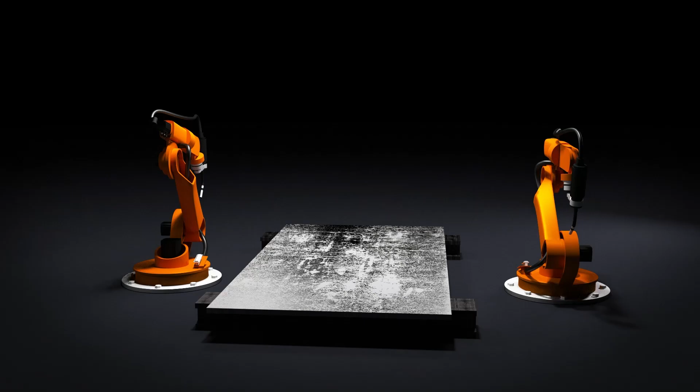It's been a minute, but I've been working hard getting all this taken care of. This will pretty much wrap up this job. Got everything built virtually. Now all that's left is for the cold-blooded killers in the shop to take care of business and build it in real life, bring it all to reality.

So this wraps up. I left the sort of not really simple, but more straightforward stuff to the end. So even though logistically it's going to be big, we're going to have two big old boxes, and we're going to have two smaller boxes, but both of them are going to be very long.

So I broke the files up into working on the casino box, as I call it - these are the smaller ones. And then I call them the mains boxes, the big main boxes. I'm going to go over those in another video, but for right now I'm going to concentrate on just the small casino ones.

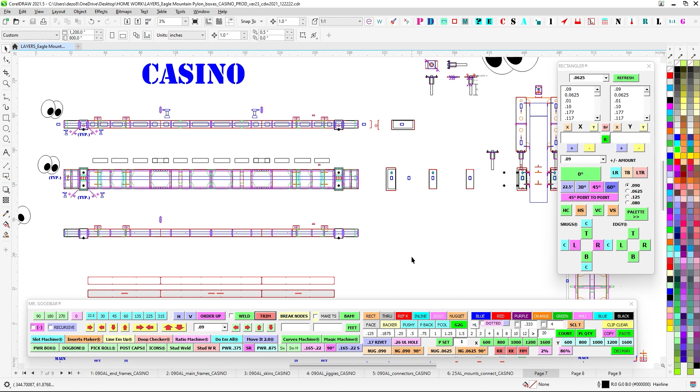These are going to essentially be the same, so one will let you get your eye in for the other one with just a few details. Like I said, these should not be too difficult for you guys. It's just a matter of making sure we do things in order so that you don't catch yourself out. So for the most part I'm just going to be going over what's weird, but otherwise just things to look for.

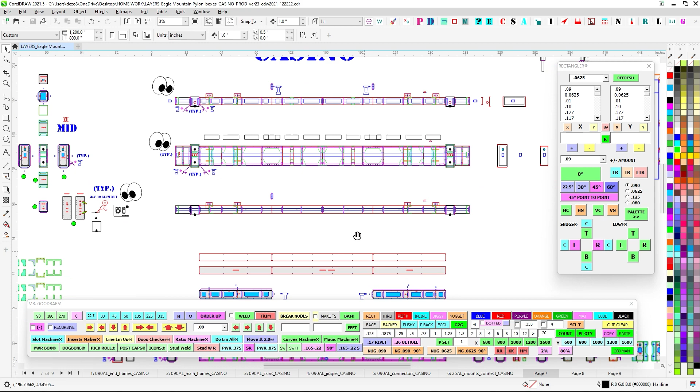But otherwise, you're making big old boxes, then you're going to skin them and that's it. So let's get after it. Let's go over the lay of the land here.

So we've got end pieces, I broke those up into their own file. Essentially you have an end piece here, and then you have sort of the strap piece, sort of the decorative bigger box. So you've got one for the top, and it just kind of mirrors.

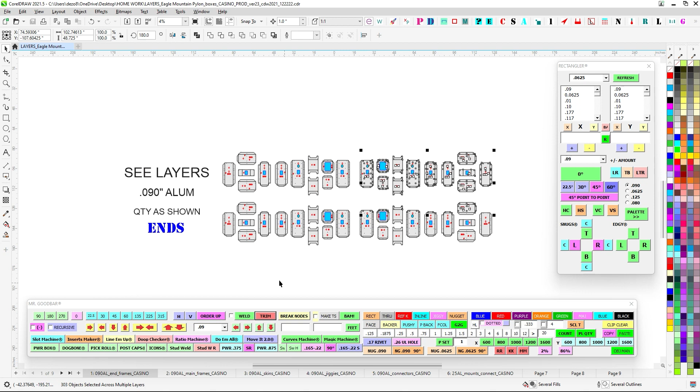So you'll have 4 ends here, and then you'll have your main frame boxes. These are here, and you've got 20 of these and 8 of these - make sure we got enough. That's for both sides.

I got all the skins - you got your end skins, you got your decorative box skins, and then the main kind of box there. Got all your jiggies on one page - so you got your ends here, ends, and then your main box jiggies.

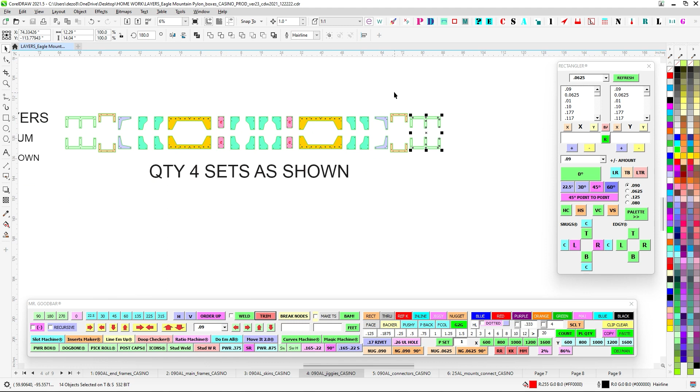So these are going to be for connectors, I'll go over that. These are that kind of decorative straps that sort of make it look like it's attached to the boxes each other. But these are also going to be how we snake secondary cable - we'll go over that.

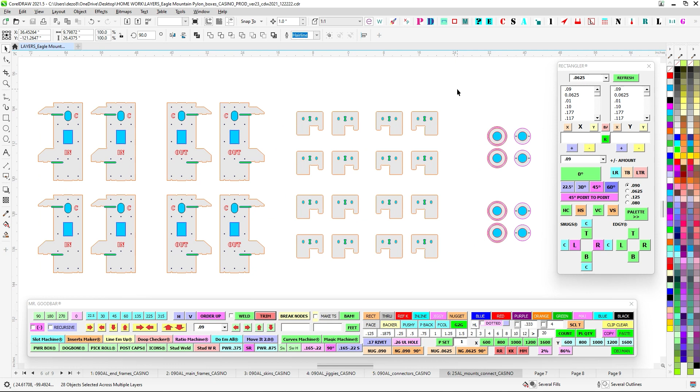And then for various things it's mixed up - these are going to be for those mounts that I just talked about, and then these are going to be for the main structural mounts, we'll go over that. So you can see there's not a lot, it's just there's a lot. But otherwise it should hopefully be straightforward for you guys.

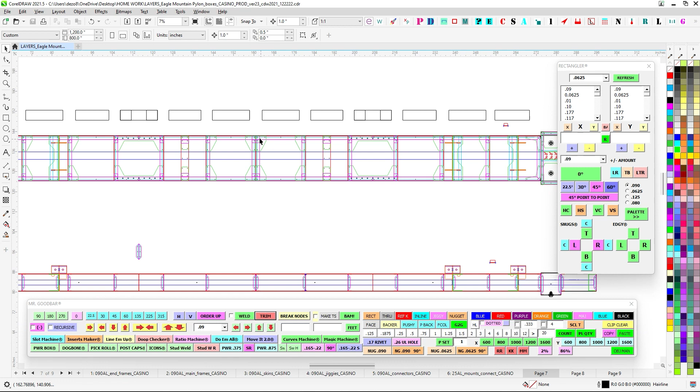So it's kind of broken up into - in order to stabilize the seams properly, I went ahead and broke these up into kind of 2 boxes put together here in the middle, and then another box this way, and then you've got the decorative kind of stacked boxes here. So what you're going to do is...

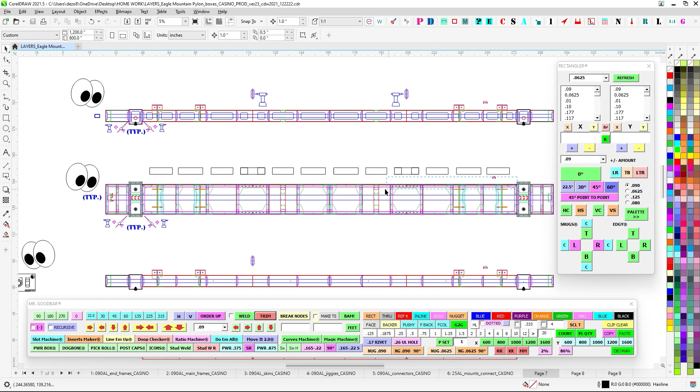Go ahead and get your long pieces going first. I'm doing the simple rivet method where you're going to rivet it together, and then your jigs here will be what holds it together. So you're going to create one long piece here that's going to take care of the main box, top and bottom, and then you're going to go ahead and put all your braces in. But the middle center ones here, you're going to go ahead and rivet those together so that way they match up and they're nice and solid.

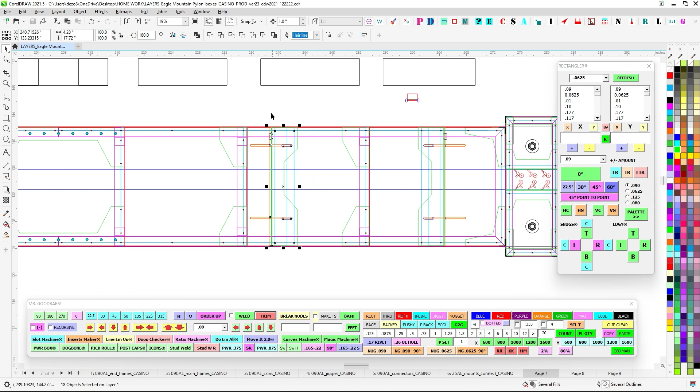And then once you get that box all ready to go, again, you're not skinning anything, you're not doing like that - you want to make sure that you get these guys in there. Probably, yeah, you're going to do that before you skin, obviously. So these are going to be your kind of mounts, so let's go over that.

So you're going to have like a top view here. What you see in orange right here is going to be how this thing basically attaches to the 3x2, and that's going to be your main burn area - you're going to burn that really well. And then that's going to poke out the back of the box.

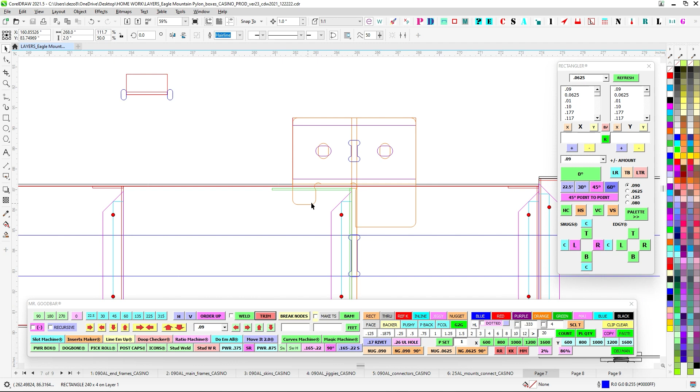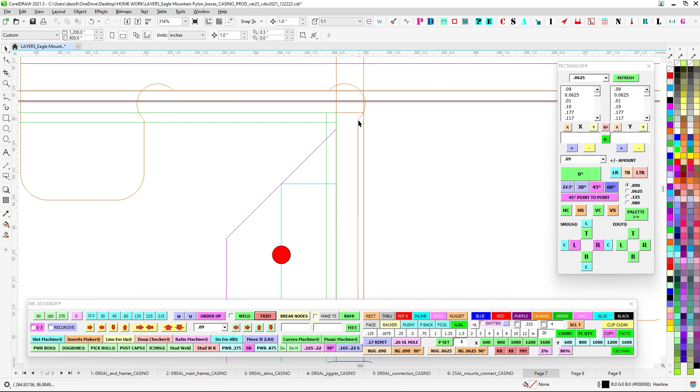And then that's where you're going to also attach your mount plate. Now the mount plate, in order to not just have a single rectangle of aluminum that can flap and be difficult to get lined up properly, I'm having it skewer into the box. You can see where I have a 16th overlay that's going to nestle into a groove in the mounting plate that will help you center it.

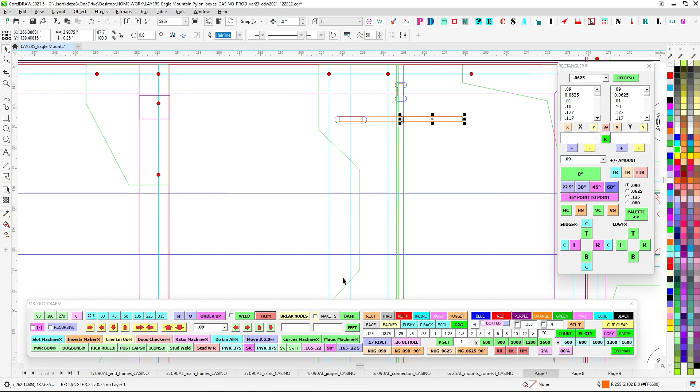You can see where the groove is actually longer on the bottom, so you're going to slide this piece in and it's going to groove to the top. And then in the main brace piece here, you're going to have a slot that this little nugget is going to slide into.

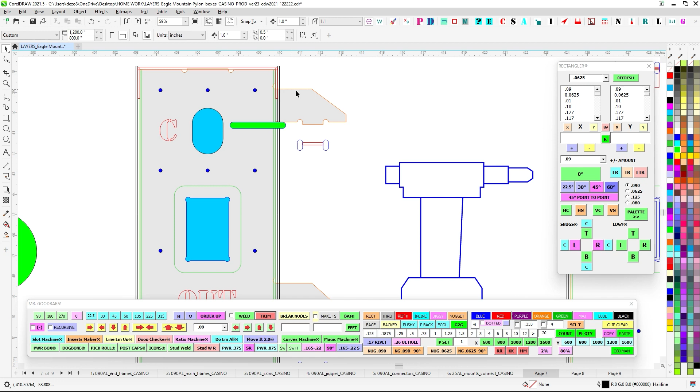So you can see where the green is here. The green, you're going to go ahead and rivet and attach that here, to your aluminum quarter piece that sticks out. So you can see where that's going to be your mounting tab top, and this is going to be your mounting tab bottom.

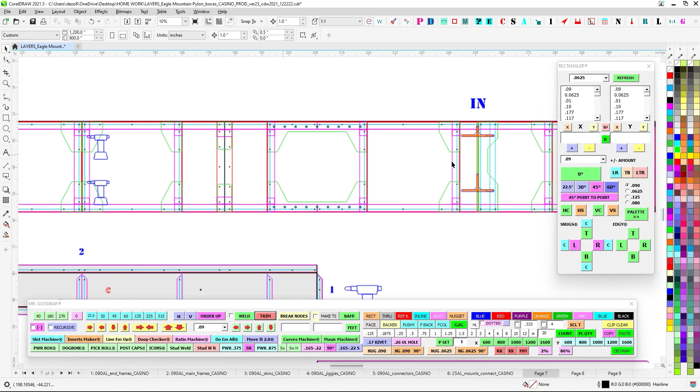It's going to rivet to that. Now you have an in and an out, and this is also going to be on the big box, but it just means that this one is on the inside of the center. So from the center over, you've got your in and your out, and then they mirror - this is your out and this is your in on this side. You can see where this one does this, and then this one's here, and vice versa. So you just want to make sure those get properly mirrored and taken care of.

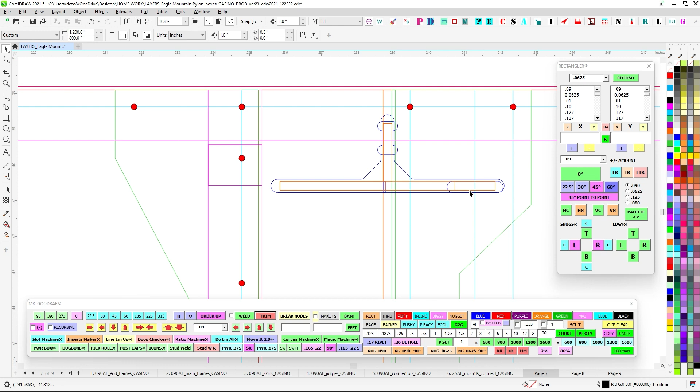And then once you slide those bricks, those little plates, they'll slide in. You'll be able to do a nice fillet weld on this side, and then you'll have a fillet weld on this side. And then you'll also be able to reach inside while the faces are off, and burn this tab to this 090 piece.

And the top view there - yeah, so you can burn right here, you can burn on the bottom, get that in there nice. This will help you get this registered, not only turning this way, but also up and down, left and right. It'll make sure this is level.

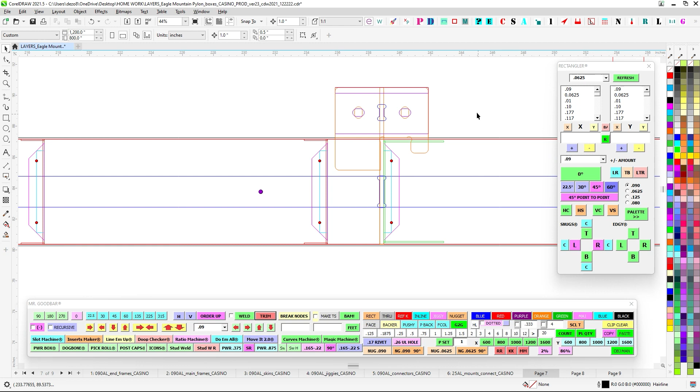So that way when they go to put that up. And then this also gives you a whole other dimension. So rather than just burning here and here, this burns here, but then this turns vertical, and it gives us all kinds of strength right here. And you can burn on the bottom too, so that way it's really tying into this plate.

And then obviously when you skewer the 2x3 through, you're going to make sure that gets burnt up really well. I went ahead and clearanced this as well, so you can burn on both sides - plenty of room here to burn. I would make sure this is rivet only. I wouldn't do Lord on this, because you're going to put heat into this and this plate's going to move around, so I don't think we need any Lord.

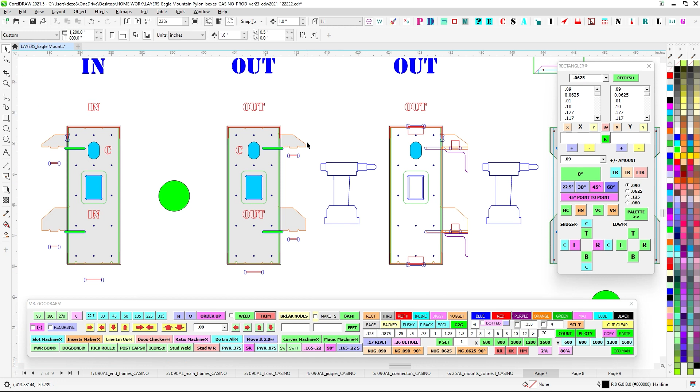Really, this 090 plate is just kind of to get you to register the quarter inch where it's supposed to be. That's really all it's doing, but it's also going to add plenty of strength. So we're good to go there. I think that's good, I think that kind of figures that out. And then the rest of it is just the normal sort of braces.

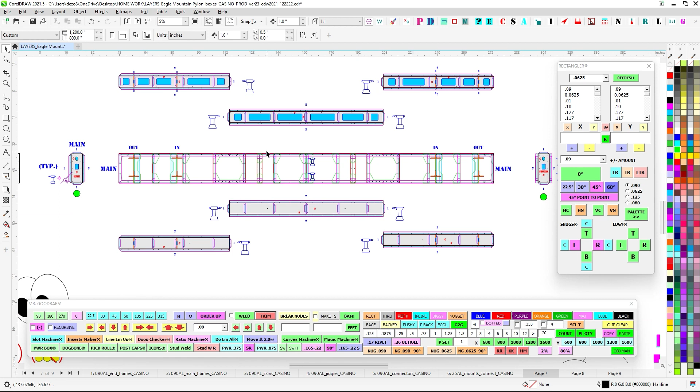Now, where we do the faces, I want to make sure these faces get on there really well, because we're used to having all of our signs on the ground, and it's basically a sign. When a sign goes up 40, 50, 60 feet in the air, it becomes a weapon. So we don't want anything falling off this thing ever. So I went ahead and made sure we have large face seams to make sure things are very stable.

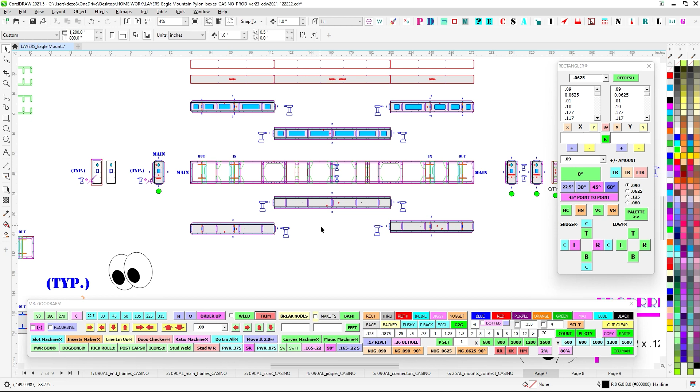So rather than just sticking them on one of these frames, they'll have their own C channels. So that's where you'll see here, you'll have your own C channels on both sides that plug in. And then that way the faces will have a very large area to Lord really well.

And then I'm also thinking that we'll want to do safety rivets here and there just to make sure. So go ahead and do your countersunk rivets on all the panels just to make sure we also have mechanical as well as chemical, all of that. Take care of it, make sure it's all good.

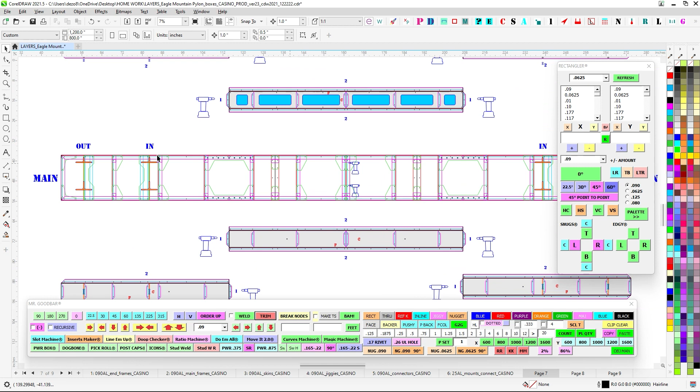So I think you guys got the idea here. It's just going to be one big box. But again, just make sure the 1/4 inch pieces go together properly. Hit me up if you have any questions or anything. And then make sure that your outside main is going to be ready to mate up to the next parts. So now we have our ends, and then we have our mid.

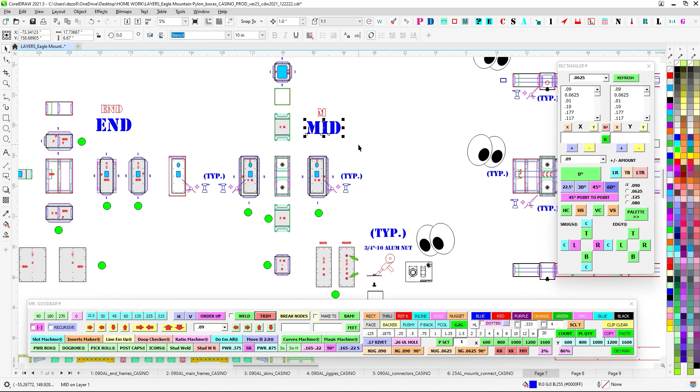So I'm calling it the mid, but technically it's all the ends here. You can see where it's this little structure here. Now this brings up the 3x2. Make sure you bring in the 24 inch, or the 24 foot, I should say. I went online, I made sure that they have this available.

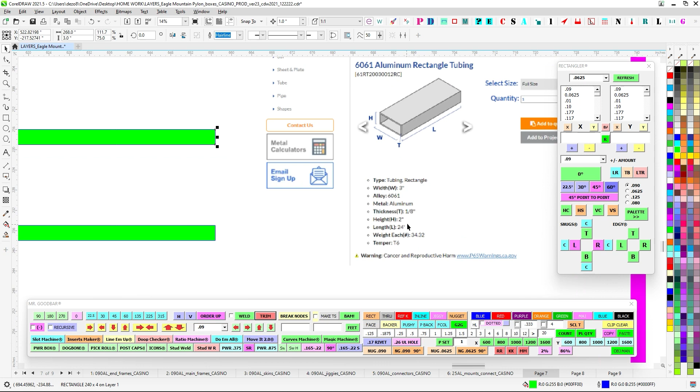You might have to call, it might have to be get it going now. It might be a lag, but I know everything we bring in is usually 20 foot, but we want to make sure we have the extra length on this, which is the reason why I went with the 2x3. You cannot get 2x4 in this length according to their website, but you can see where we need to make sure that it goes all the way out and extends into these decorative boxes.

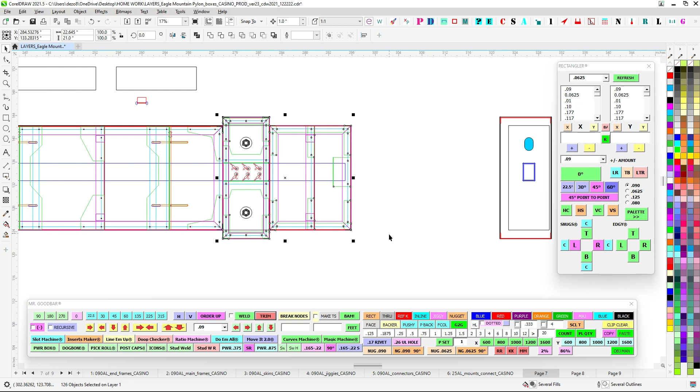Now, the problem is these technically are decorative, but the problem is around the shop, I guarantee you this is where they're going to get lift from, and also it'll probably get rested on here. The idea is that this is where the sign mounts to the actual post. So really this is non-supportive. But ironically, like I say, around transportation, the way we lift these things will actually be the Achilles heel.

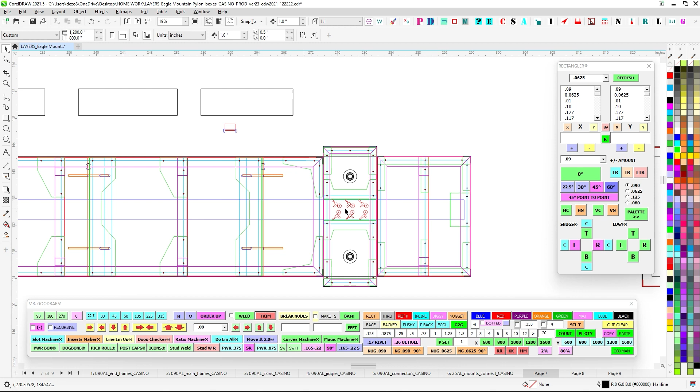So these need to be stronger around our shop. So that's why the 2x3, it's important that it skewers all the way. A normal 20 footer is not going to fit. It's going to stop right here. So we need that extra out, so that way it goes all the way out and extends into this box. Then we have the strength.

So what you're going to do is just build these guys. They are directional because you can see where, let's go take a look over here. You can see where they're offset and justified forward. So the backside's skinny, so these are asymmetrical. Make sure that they get assembled properly that way.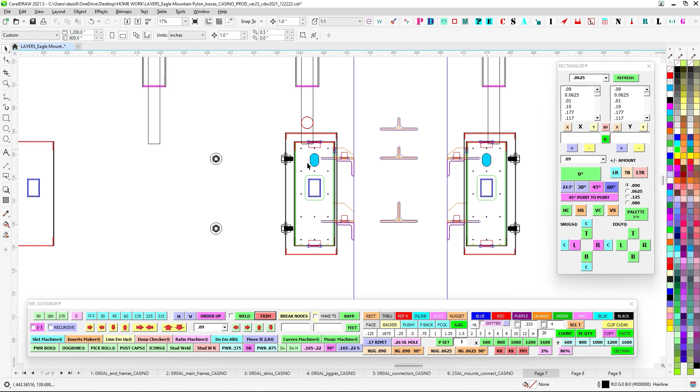So when you do the mid, you're just going to create this little box here, right? You have a little jig here, and then you have internal pieces here and here that essentially snug up against the tubing when it comes through. So you'll be able to burn the tubing to these pieces right here. And then you'll also be able to slide this on.

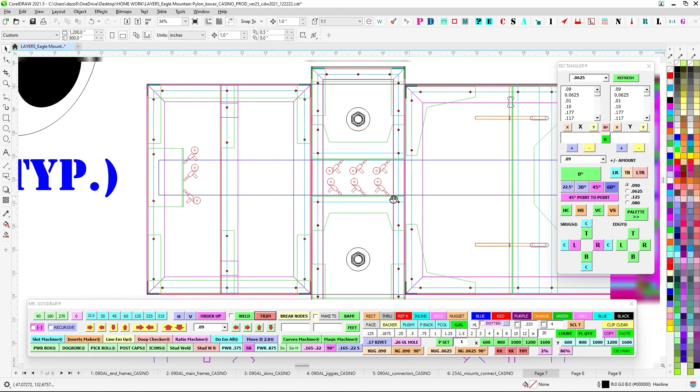And then I have matching Cleco. And if you want to do whatever you think will work, but as long as we get some rivets in there or some screws, or I'd like to see welds. I'd like to weld these together and then make sure that it's welded to the end of the box. And like I said, the end of the box has a receiver pattern ready to go for that.

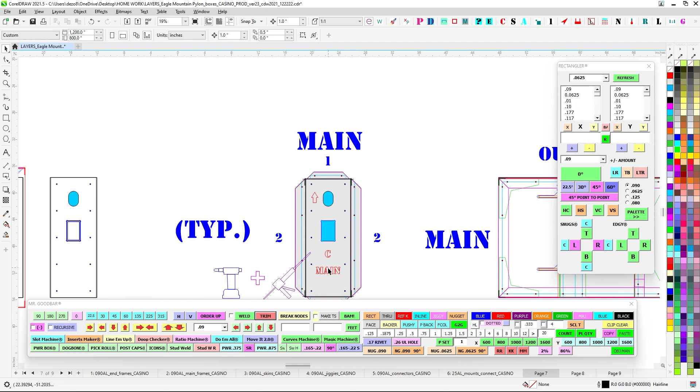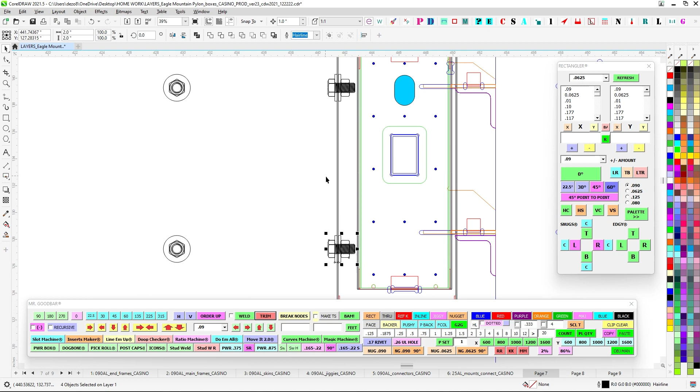So you'll bring that in. That'll be this sort of decorative, I call it the strap. That's kind of what they're calling it. So it's going to look like this thing is going to take this pipe and it's going to go up into the main box here. So it's going to kind of look like that it's sort of strapped, and it's going to make it look like these bolts are doing something, even though they're not.

So you'll get this box on there, slide that on. Then you're just going to create a little end box. Again, simple. One side kind of goes this way. Just make sure that. But again, I wanted to make sure that when we're lifting, because I know that's what's going to happen, is it's going to be lifted from here, but by somebody just, hey, help me grab this, help me carry this.

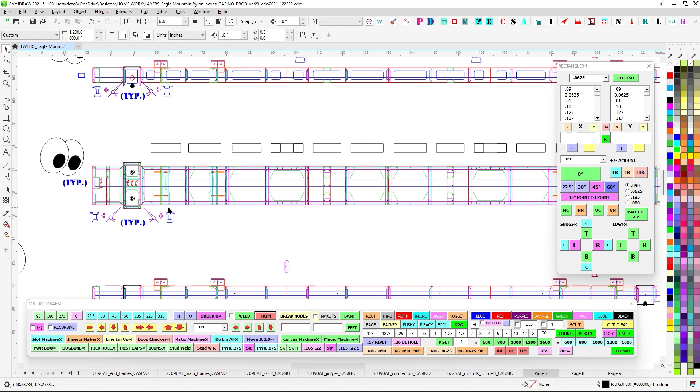The idea is that it's going to be lift points inside. You'll be able to choke this bar inside here, and then you'll be able to lift it that way. But until then, we got to make sure this gets nice and strong.

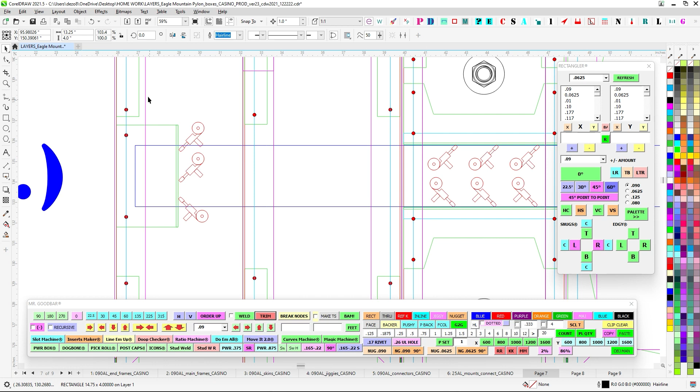So I have this little guy here that's going to take any strain and get it to the end. And then you'll have these two parts here. Again, bring these in. So you'll have the matching receiver pattern on this side. And then this part here will slide on.

This side does not have any electrical in it, so there's no drain holes or anything, and there's no way in. So it's fine, there's no need to get in this once it's all patched up.

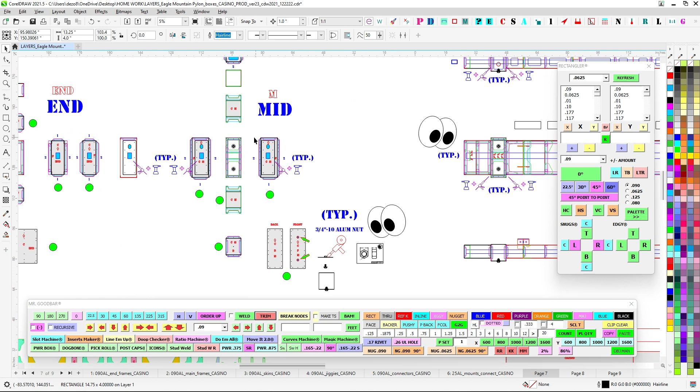But this one here, you have a little door up top, and that's going to be where the pipe enters the aluminum tube on the little mount on the strap. That's our secondary pass through, and that gets us to the main boxes and to our electrical. You can see where it's recessed there, it's going to be a removable panel for that.

So once you get this all done, get these burnt up nice, get these all done. Skins are off still on this. Go ahead and tack this to there. Make sure this is all good, make sure this is all tacked up and this is all one unit. Then you can start to skin.

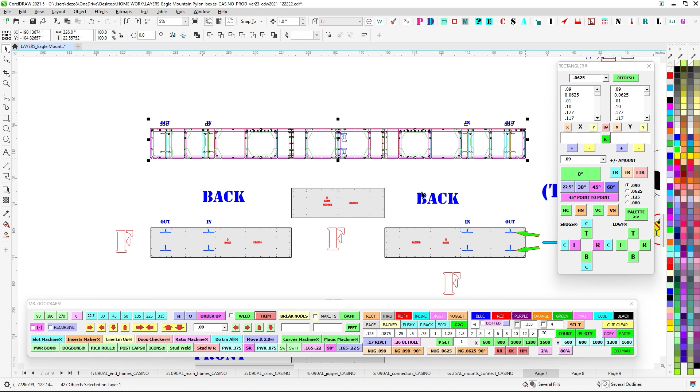So the internal box just has the three, this is just sort of normal, you weld that all together. Make sure you have your faces proper, because for the channel letters up front you have your power holes and all your mounting holes. But for the backside, in is in, out is out.

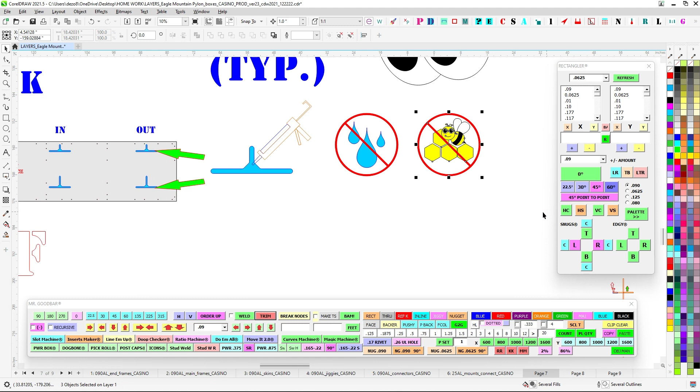You'll figure it out. You'll want to make sure that because we're going to be in a very agricultural area, with some orchards around and whatnot, you're going to be having bees. So we want to make sure that for the most part you're sealing it for water, but these are going to be very large openings that allow you to slide this over.

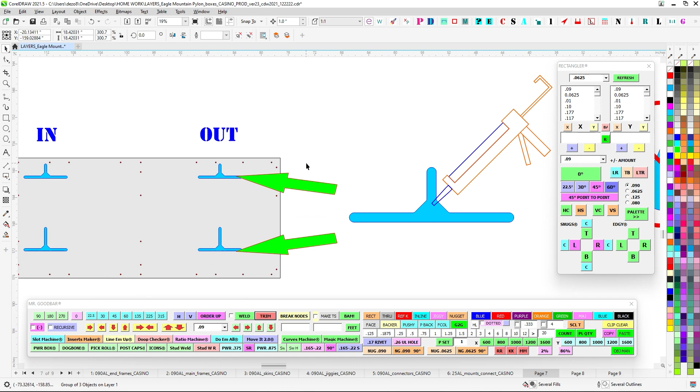Again, I encourage you to test fit this for sure, test fit. But these are going to slide over the welded up brackets. And then at that point, once everything's done and everything's nice and sticky, go ahead and silicone or caulk these up really good.

But also keep in mind any sort of quarter-inch hole, bees -- we don't want them living in there either, especially once you go up there in your 50-foot lift to do some servicing, and then surprise.

Only the bee lady can do that.

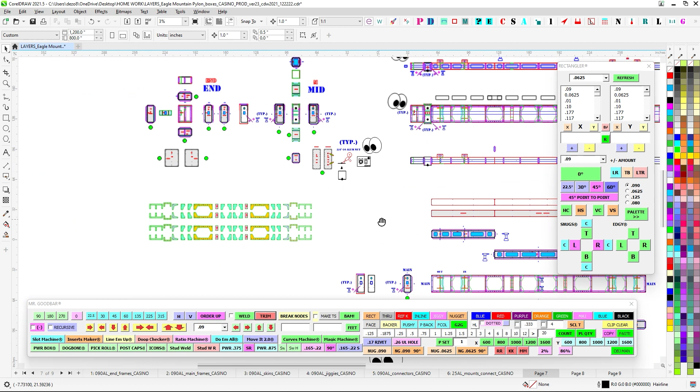So we're going to make sure all this is welded up really well. And then these guys here, before you close these up, you can close up the little end -- that's fine, you'll see where it's labeled end and it matches all the holes. But these guys here are going to need the 3/4 by 10 aluminum nut.

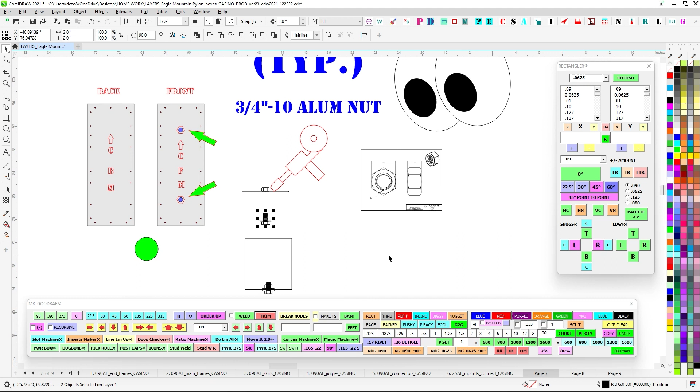Now you're going to weld these on, and then this is going to be purely decorative. But you'll see that for convenience, these are going to be the same bolts that we're going to be using on all of the wayfinders for the rest of the property. So 3/4 by 10 is the go-to, so I kept it that way -- kind of simple, less inventory.

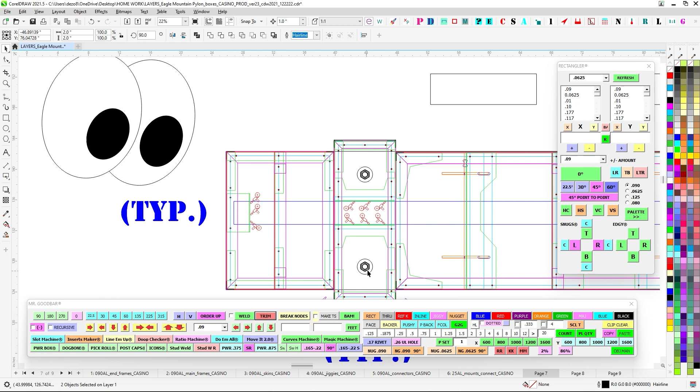But you will need to tack these on and then close it up, so that way we have blind nuts right here ready to go. Because once this goes on, you can't reach this one. This one, you'll have the ability to reach in and mess with that, but then this is going to be all blocked off. So make sure that, again, you don't want to get ahead of yourself.

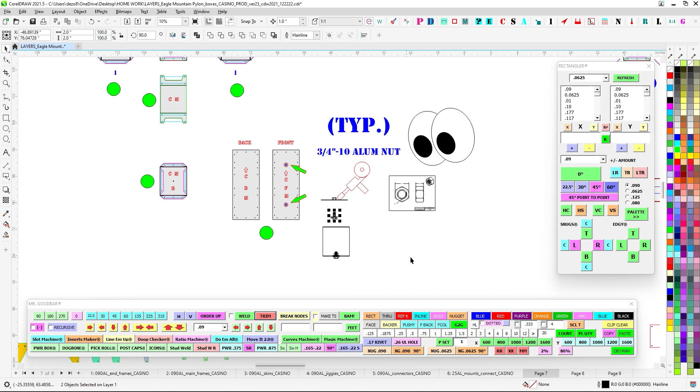So we're going to bring in plenty of these 3/4 by 10 aluminums, and again this is the same bolt that we're using for the rest of the project for the decorative bolts. So that's pretty much it for this guy. As far as the boxes, it's going to be straightforward for you guys, not going to be really anything too crazy. You just want to make sure that you dot all the I's, cross all the T's, make sure everything's sexy.

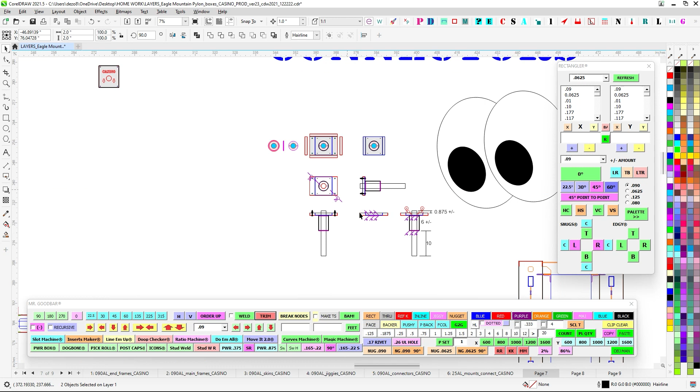Let's talk about the throughs though. So this will extend, this kind of is integral, this actually mounts to the main boxes, but because there wasn't so much going on here, you'll see once we get to these main boxes there's a lot more going on. So I went ahead and chose to make these guys be the spot where you do these.

So the idea is you're going to take these 090 plates and you're going to bend them up and then tack in the ends.

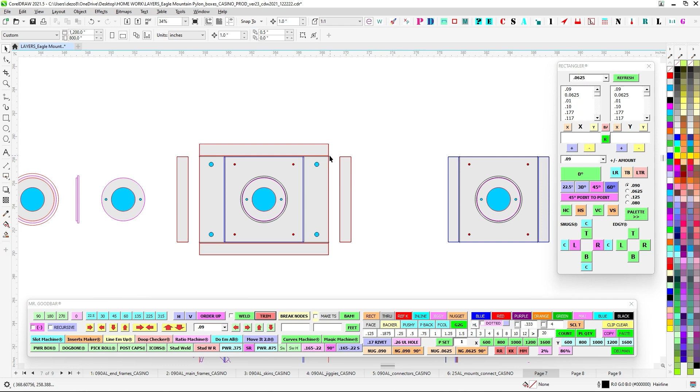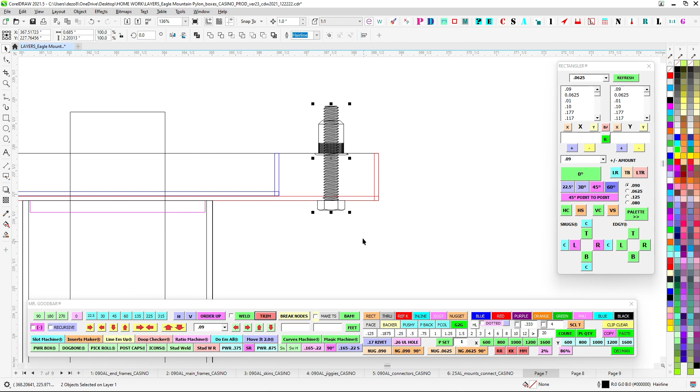So it makes it look like it's a 1-inch tray like this. You see the red, you sort of have this 1-inch tray. And then for stability, you're going to weld in another one that kind of crosses this way. That way it gives it strength and gives it some rigidity, because we're going to tighten up some 5/16 against this, so I wanted to make sure it's nice and strong.

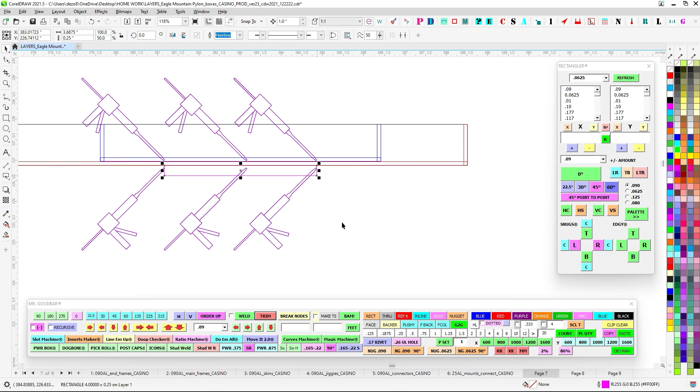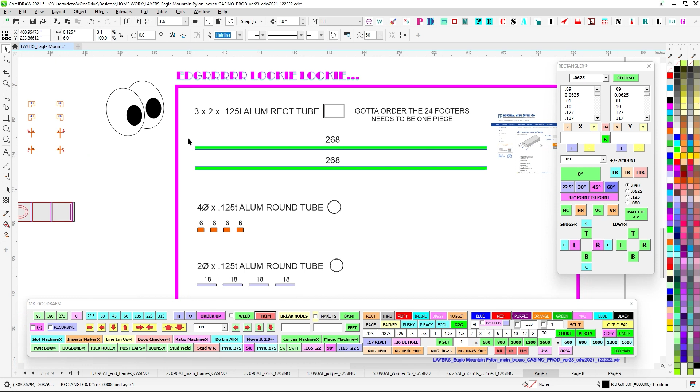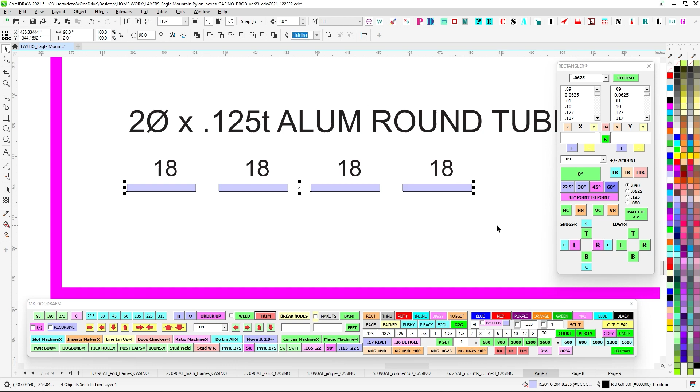And then you're going to cut, let's go over the cut list there. So you've got your 2 268s, again bring in your 24 footers, and then you're just going to do 4 6-inch chunks of 4 by 1/8. I already talked to you about that, you said you had it laying around. And then whatever you need to bring in, even if it's an 1/8, it's just adding weight, but the inside of this diameter doesn't really matter as long as it's 2 on the outside, and you're going to do 4 at 18. So that's what this is for.

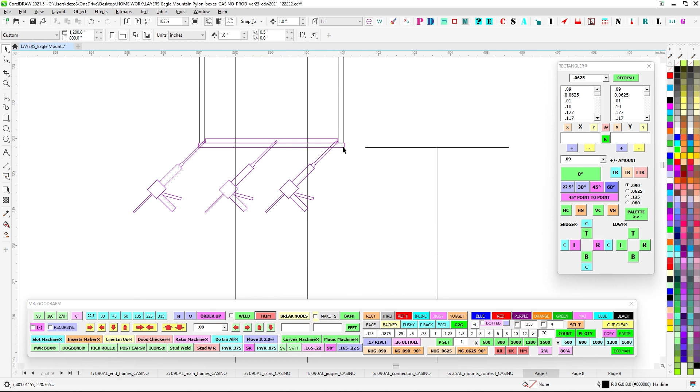So what you're going to do is get ready, take this disc, weld it to the outside here. Then you're going to take your 4-inch tube, just do a big weld pass on that, squish that up in there, clean it up, but make sure there's plenty of fillet. And then just like our fence posts, you're going to take this one and you're just going to cap it and squish it on there. And then you can clean it up just like our fence posts.

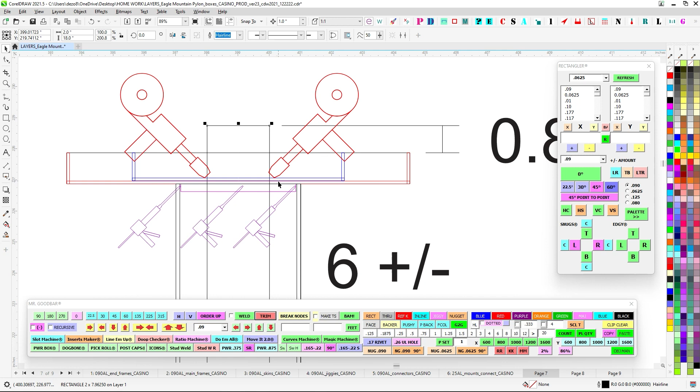Then you're going to take the 2x and slide it through this, and once it's about 10 inches or so, it's fine, whatever. But as long as you got about 10 inches sticking out here from here to here, on the inside here, go ahead and put some tacks. Again, it doesn't need to be fully welded because now you've got welds here.

So don't worry, it's kind of a thing, but it's going to be just decorative. Really, this is just a conduit, like running electrical conduit. All it's got to do is sit there and look pretty, because this part's going to do all the work right here. But you want to make sure that this is well welded. I got a gap here, make sure this is all welded up really well. And then you can even maybe weld it in there, kind of inject it and then clean it up, and then throw some tacks. That way this conduit is ready to go.

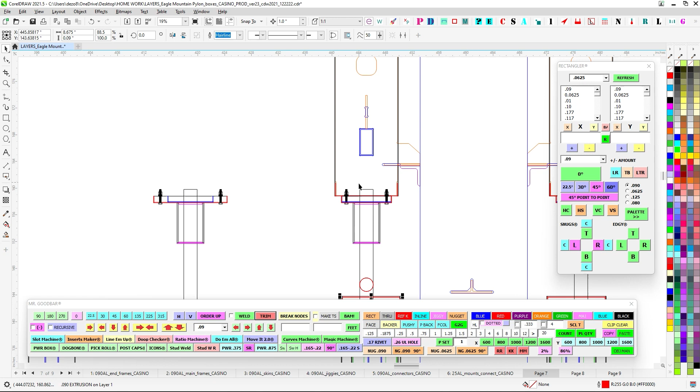Now, when install goes to put these up, they'll put these boxes on, bam, like that. And then they'll be able to take this lid off, and then this will also be loose. So then they can take this thing, tuck it inside, run the pipes up, they'll be able to slide the plate on, put it up there, bolt it up, and then they can slide the plate down and screw it down. So this allows an opening to run power, you'll be able to run your hand in there and collect all your power from here, reach your hand in, and then right here, obviously you'll have this opening so you can feed your power through to here.

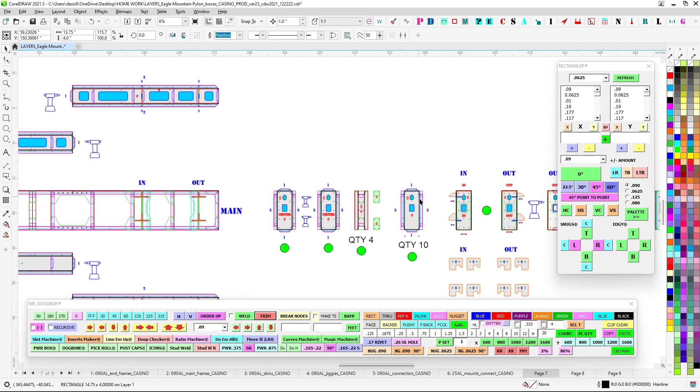And I made sure that I have snaky holes through everything, so you'll just be running the power through the tops here. You'll be running your secondary LED cable all the way along as you collect the wiring all the way along. I have everything towards the top for easy access. So you can just collect this all, create a leash, and then get it to one of the sides.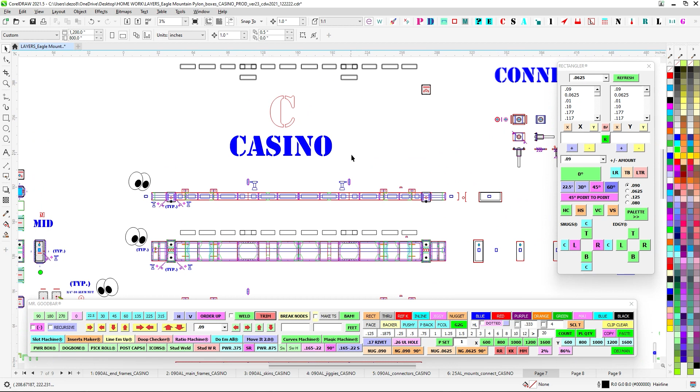Now, we'll be going over the mains boxes and showing you which one's going to have the main power. So there is a direction you kind of should collect everything, so it'll be up to you. These two casino boxes can mirror, they are identical both ways.

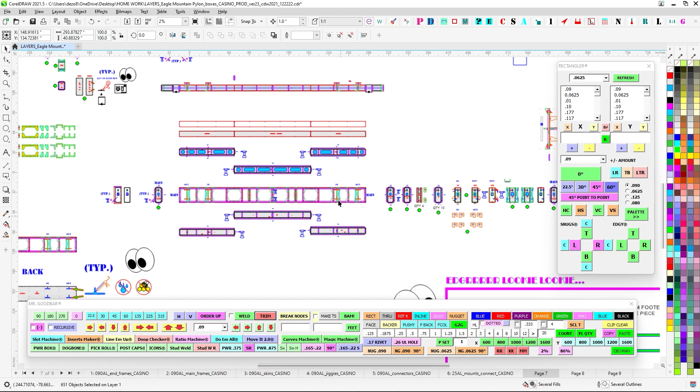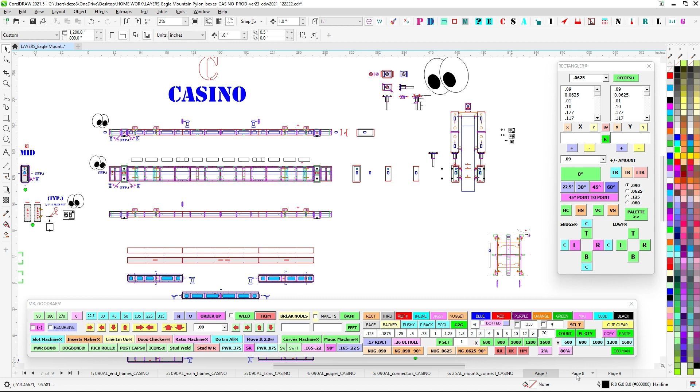So obviously it says casino one way, but when we flip it, it goes the other. But you should choose which one you collect. The secondary should go to this side on one, and then flip it around, and it should go the opposite direction where they both collect on opposite sides, because we are going to be bringing the power to one side. So make sure, as a matter of fact, I'll just show you that's here.

So this is the south facing sign, and this is what we're used to seeing. So the idea is that everything's going to be over here on the south side. We're going to be going over this with the big signs, with the big boxes. But you're going to need to get everything. So like I said, this box could flip around and go on the other side. But if you collect everything on this side, that's going to be wasted voltage drop to get all the way back.

So when you go to wire these, you have to choose a south side one that will collect to the right side here. And then the north side, you'll have to collect to the opposite direction and make sure that it's on this side, but we will jump it across, and I'm going to go over that. We will jump it across the mountains and bring it back in. But everything's going to have to collect to this side.

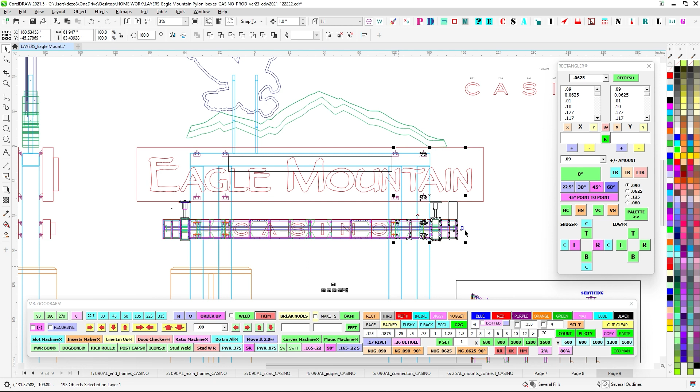You are very used to seeing this view. This is called the south side, or the south. So again, everything's going to get done in this area, but we're going to go over that pretty much right now. But that's it for the casino.

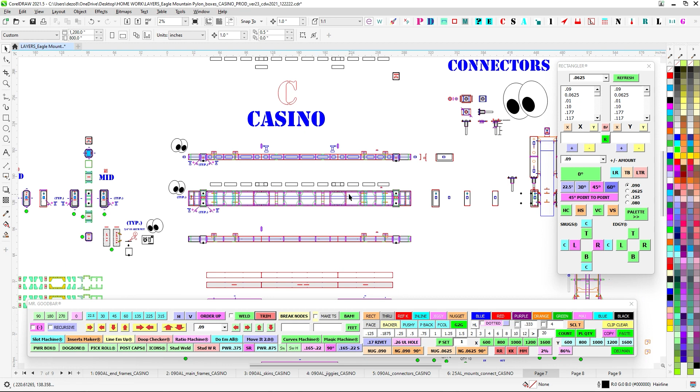That's how you build it and everything. But when you go to collect, you will kind of choose, say this is going to be the south side, and we're going to collect it over here. And then the north side will be the opposite side, but you'll have to go the other direction and make sure it's all on one side.

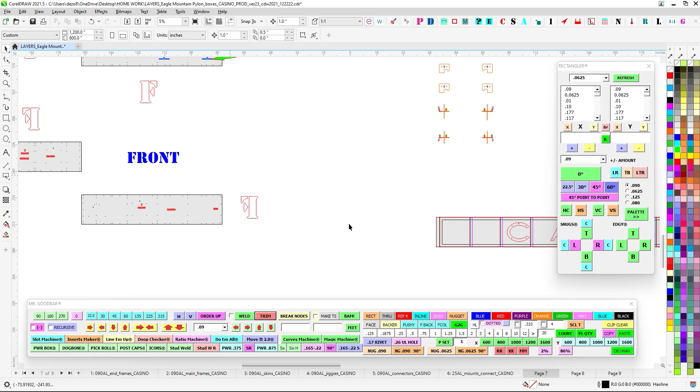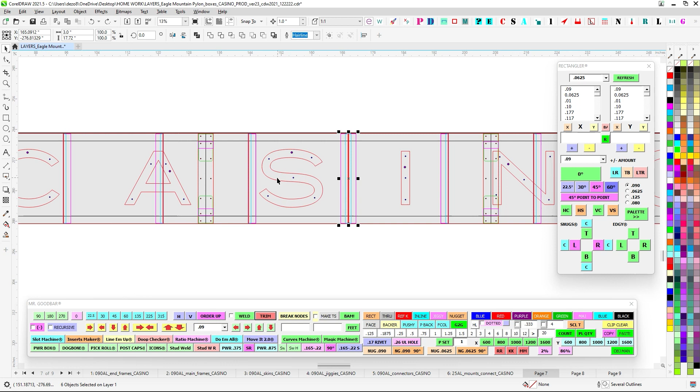Also, a heads up, in order to make it simpler, I try to avoid the verticals when I go to do the letters, because when I put a mounting hole on one of these, it becomes that one - it's not standardized. So in order to keep things standardized, I tried to avoid getting the mounting holes on the frames. The downside of that, though, is it loses the added bonus of having a mounting screw sandwich everything, which is a good safety feature.

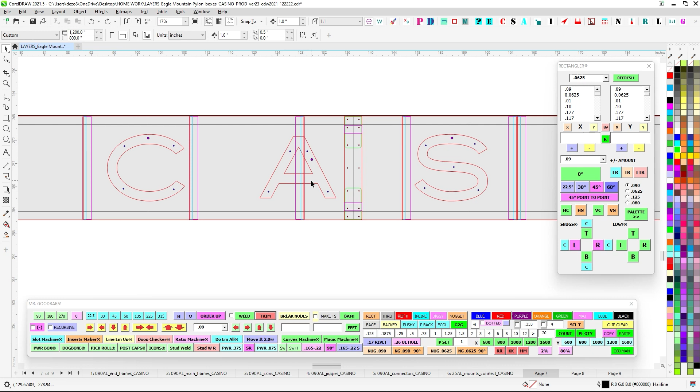So what I encourage you to do, if you can, is at the final assembly, when you've got all the LEDs and you're mounting these letters up - because I'm pretty sure they're all going to be sent out with the letters on there, there's no reason not to - take the time to eyeball a vertical where you can, and go ahead and self-tap through and get a nice screw through a face, through a letter, and into framing where you can.

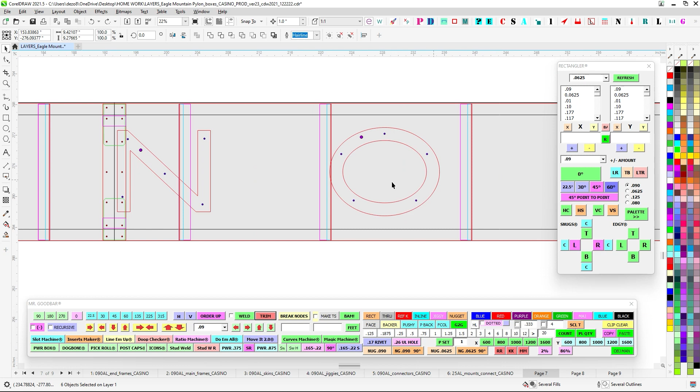Obviously S doesn't help you out, but if you can do it on the N here, maybe catch it on the O - no. So anyway, this one's not so bad, but I know on the bigger one there's going to be a lot more chances to make sure that we can add in some safety before you cover up and put the trim cap faces on. Go ahead and shoot a screw where you can, because otherwise this is just adding more weight to the faces that are relying on the bonding.

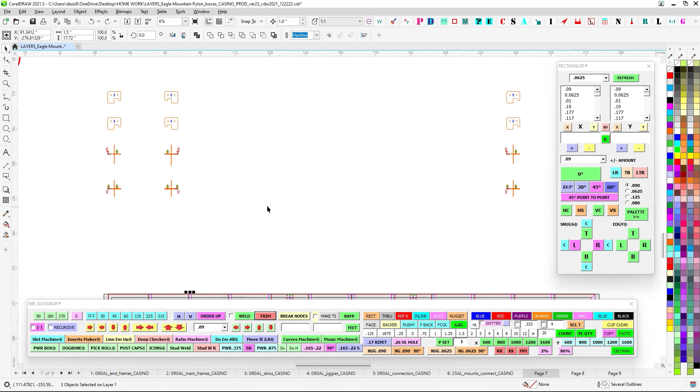So again, let's make sure that we really get these bonds really well. Again, that's why I gave you these extra wide brace things here - stabilize all your seams, let's throw in some safety rivets. Let's make sure these things are super safe, because again, we're getting global weirding too - we're getting all kinds of weather. So let's just make sure that everything's dialed in.

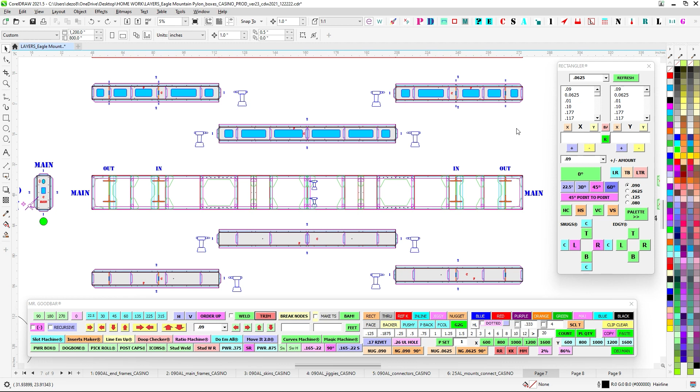So, all right, that's it for this. Again, so you'll go to school on this though - there's, you'll see where that's going to be your 16th groove. So you can see where it's going to slide into there, and that's going to justify up top.

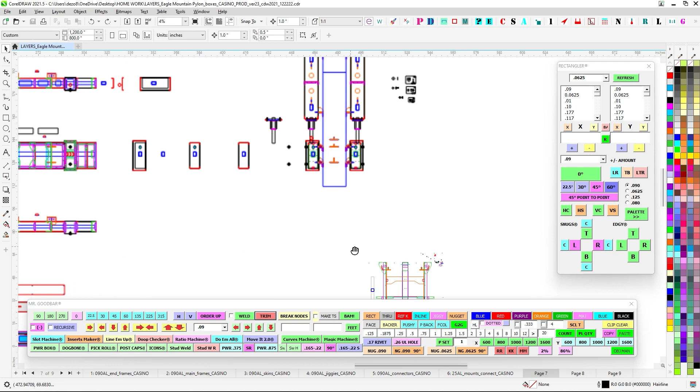So just keep that in mind. It's going to be the exact same thing on the big ones. So anyway, I think that's it. Thanks for putting up with me jumping around.